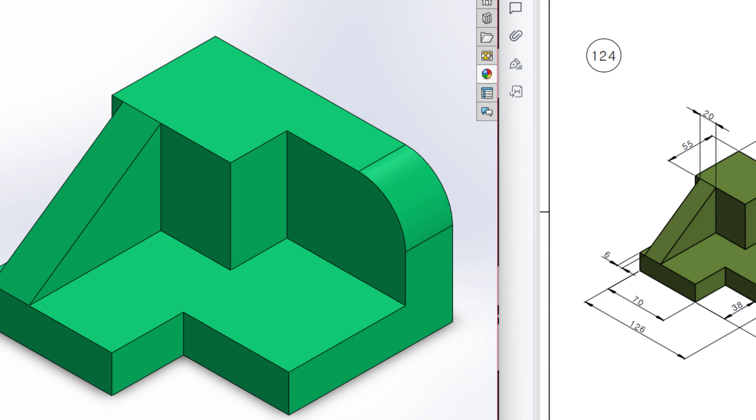Today we're going to solve this 3D problem. This is the isometric view, and all the dimensions are located in the isometric view.

First of all, I will start drawing from the top view. In the top view, I'll draw this rectangle. This rectangle has a dimension of 126 by 125 and it has an extrude boss of 20 units.

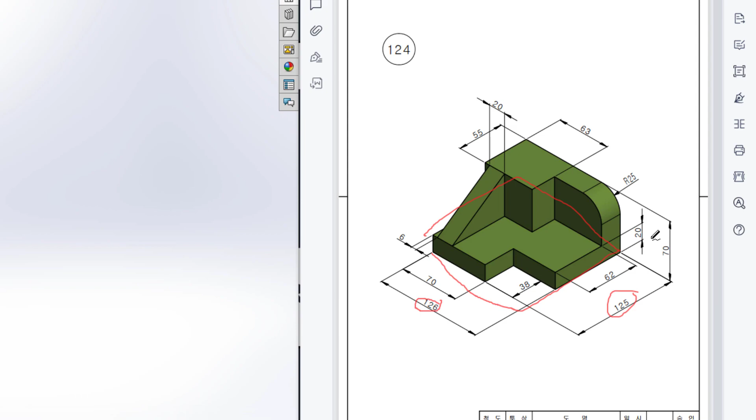So I am selecting the top plane. Now sketch. Select the center rectangle and place it to origin, then dimension it to 125 by 126. Now isometric it for a better view.

Now go to features. Now extrude boss it to 20 units. Now press OK. After that we can see that we have another small rectangular shape here.

This small rectangular shape has a dimension of 63 by 55, and it will be extruded boss to 70 minus 20. So I'm selecting this upper face.

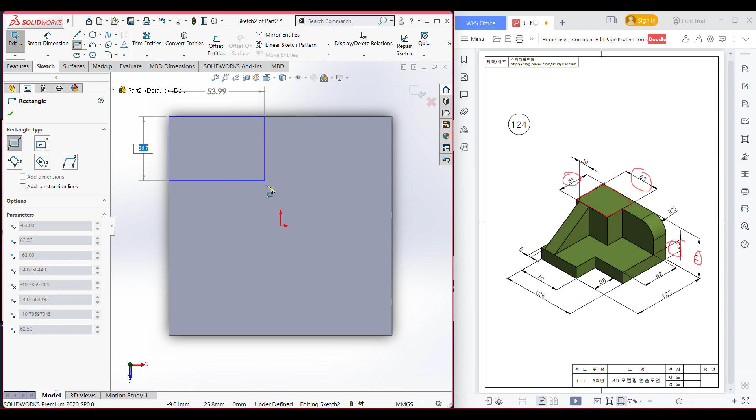Now sketch, normal to it. Now select the corner rectangle. Place it here and dimension it to 55 by 63. Now isometric it for a better view.

Now go to features and extrude boss. Now extrude boss it to 70 minus 20 units. Now press OK.

After that, we can see we have another shape here. It is also a rectangular shape and we will later fillet on it. So in this rectangular shape it has a...

If we join these 2 points like this, and also draw this rectangular shape, we will extrude boss it to 125 minus 38 minus 62, which will be 25 units.

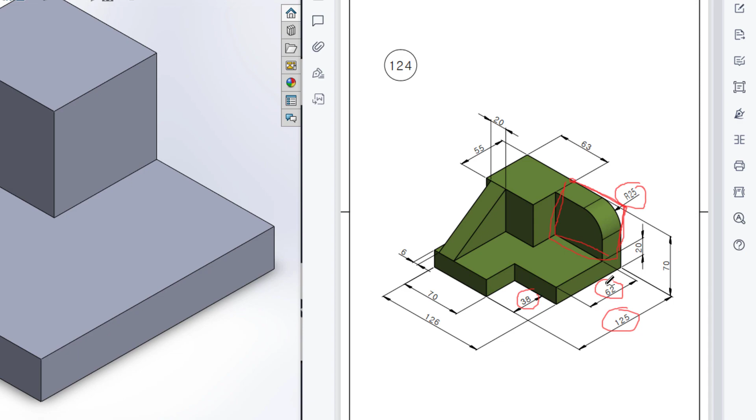So let me demonstrate. Select this face. Now sketch, normal to it.

Now select line and place a point here, draw a vertical line. And to get an indicator how much we need to go, drag to here, and you can see we are getting an indicator. So our horizontal line is 50 units.

And then draw another line. Now connect all the lines. Now our rectangle is drawn. Now isometric it for a better view.

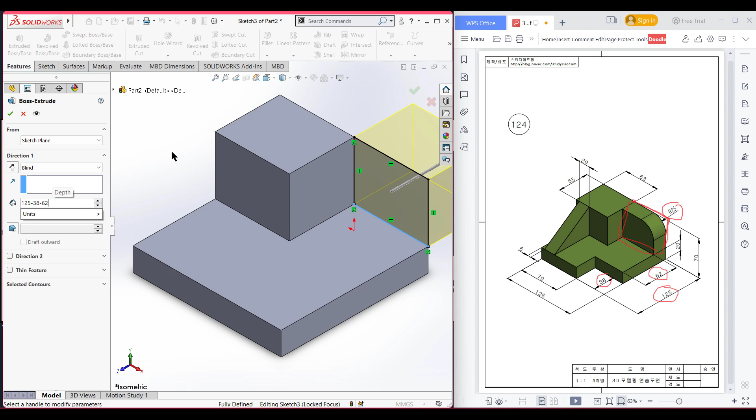Now go to features and extrude boss. Now extrude boss it to 125 minus 38 minus 62, which will be 25 units. Now reverse the direction. Now press OK.

After that we can see we have a fillet here of 25 radius. So go to fillet option and dimension it to 25. Now select this line. Now press OK.

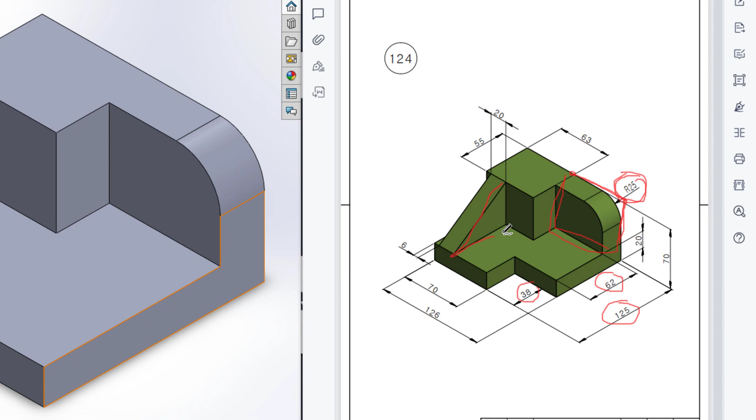Then we can see we have a triangular shape here. So for drawing this triangular shape, I will first take a reference plane in this section, which will be a reference plane of 6 unit offset. And from that reference plane, I will draw this inclined line. After drawing this inclined line, I will rib it to 20 units.

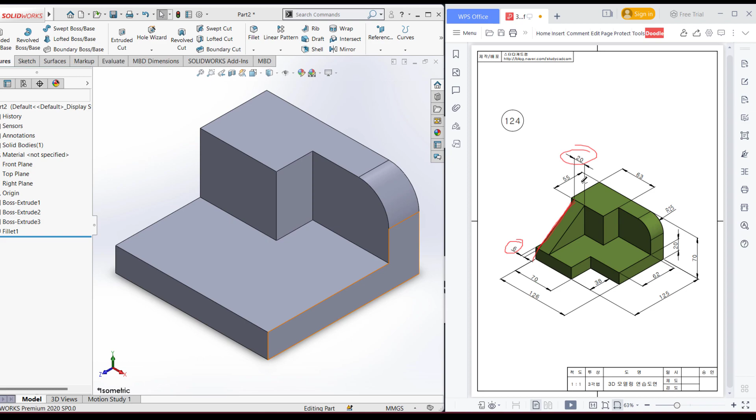So I am selecting this face. Now select reference, select plane, and dimension it to 6 units and flip the offset. Now press OK. Now select this plane.

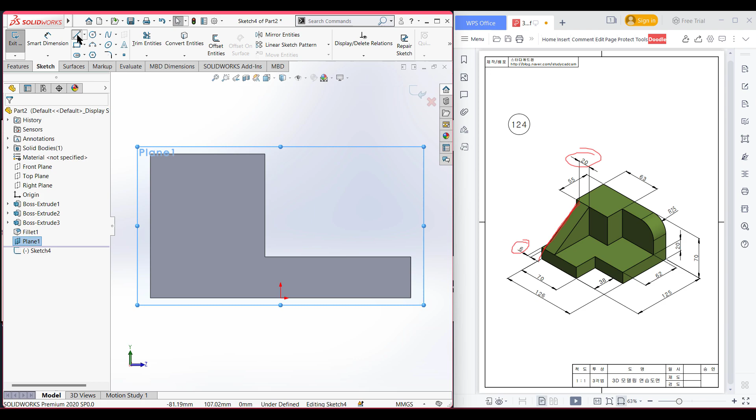Now sketch, normal to it. After that select a line and place these 2 points and connect these 2 points. Okay, now isometric it. Now exit sketch.

Now go to rib option. In the rib option, select this one and dimension it to 20 units. Now press OK. Now hide the plane.

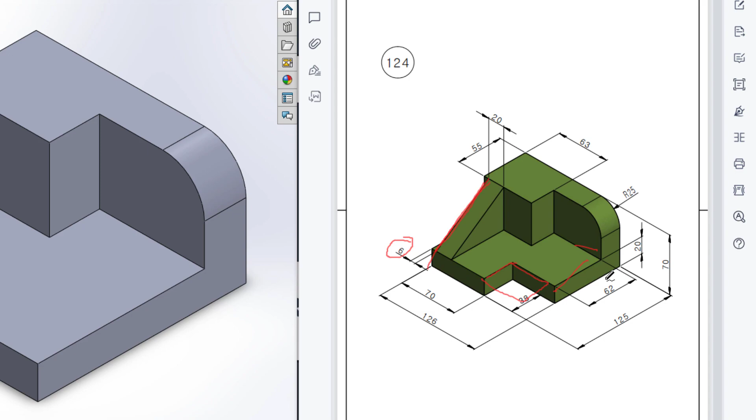Now in the sketch we have another rectangle like this one, and this rectangle has a distance from this line to here of 62 units, and from this line to here of 70 units.

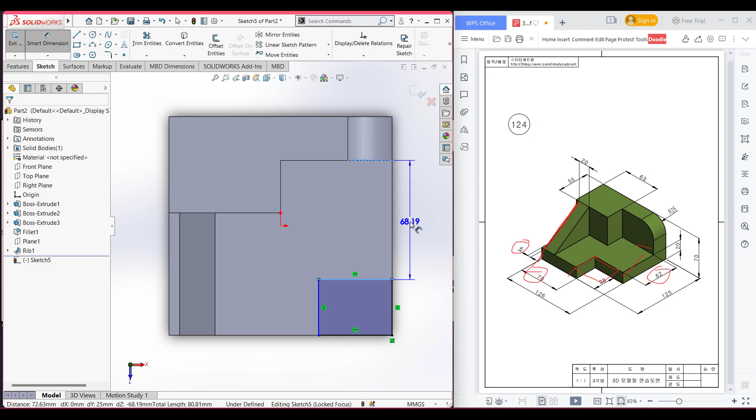Then I will extrude cut it. So selecting this face, now sketch, normal to it. Now select a corner rectangle and draw a corner rectangle. After that, select the smart dimension option and dimension this from this line to 62 units.

And from this line to this line, 70 units. Now press OK. Now isometric it.

Sorry, we need to redimension it to this plane. So select smart dimension and dimension this to this plane. This will be 70 units.

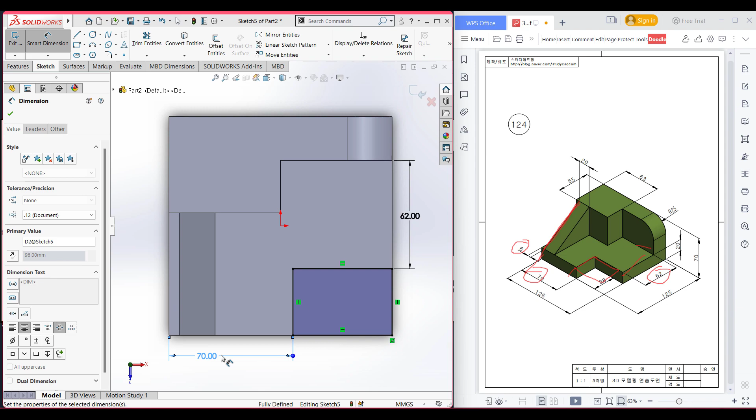Now isometric it. Now go to features and now extrude cut. Now press OK.

As you can see, we have drawn our 3D sketch. Thank you for watching till the end.